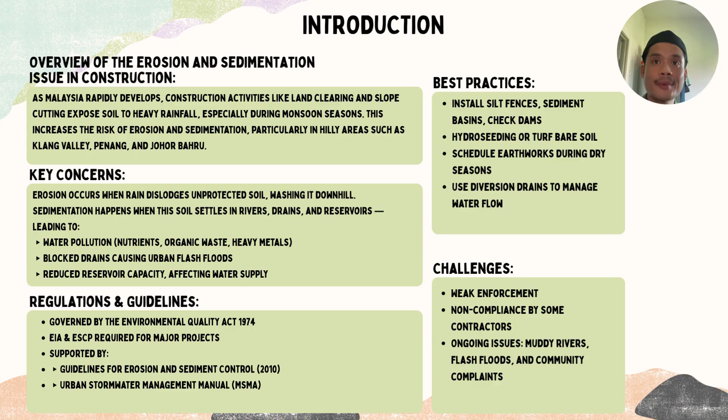What is the challenge? The challenge is, however, despite these tools that I explained, weak enforcement remains a major issue. Some contractors neglect or poorly implement control measures, leading to repeat problems like flash floods, muddy rivers, and public complaints.

Go to the next part, which is the importance of controlling erosion and sediment. Why it matters? Controlling erosion and sediment is especially important in Malaysia due to our frequent and intense rainfall. When construction sites are cleared or excavated, the exposed soil becomes highly vulnerable to being washed away by stormwater. If not managed properly, the soil will end up in nearby rivers, lakes or drains, which leads to sedimentation and environmental problems. And it also causes environmental impact.

Sedimentation doesn't just make the water cloudy, it disrupts aquatic life. When too much sediment enters a river or lake, it blocks sunlight, lowers oxygen levels, and can even bury fish spawning grounds. This affects our biodiversity and overall ecosystem health. Plus, the sediment often carries pollutants like oil, nutrients, and heavy metals that further degrade our water quality.

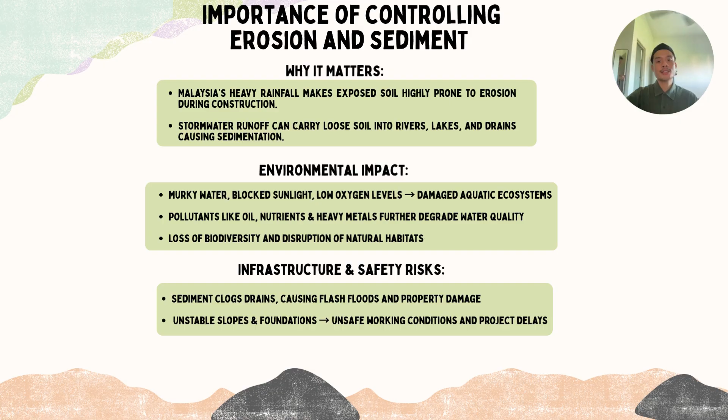It also causes infrastructure and safety risks. There are real risks to infrastructure and human safety. When drains are filled with sediment, it increases the chance of flash floods, especially during heavy rains. As such, uncontrolled erosion can destabilize slopes and weaken foundations, making the work site dangerous and delaying project completion. So, let's move on to the next part, which is our objective of this project.

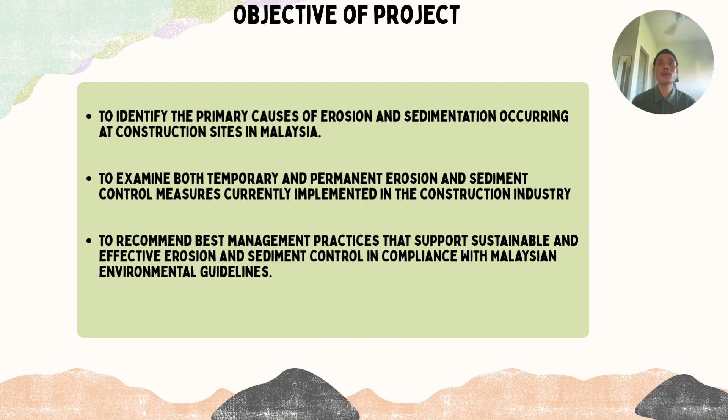First, we want to identify the primary causes of erosion and sedimentation occurring at construction sites in Malaysia. Second, we want to examine both temporary and permanent erosion and sediment control measures currently implemented in the construction industry. And for the third one, we want to recommend best management practices that support sustainable and effective erosion and sediment control in compliance with Malaysia's environmental guidelines.

Hello, Doctor. This part is a literature review. Understanding erosion and sediment risks in construction. Construction activities often expose soil to erosion, especially in rainy regions like Malaysia. This leads to sediment runoff harming water quality and aquatic ecosystems. Erosion types include rain splash, sheet, rill, and gully erosion, which transport soil into nearby water bodies.

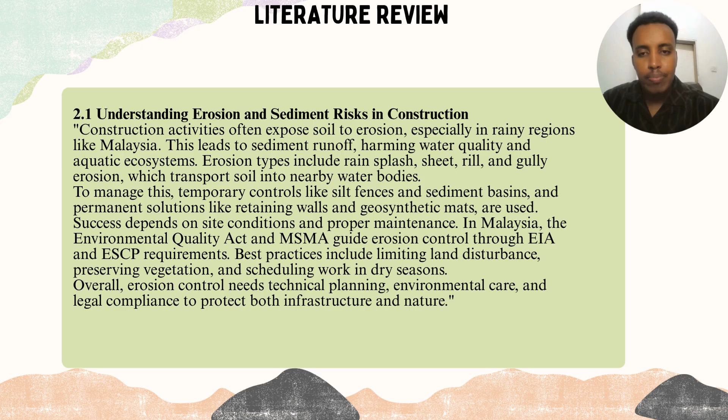To manage this, temporary controls like silt fences and sediment basins and permanent solutions like retaining walls and geosynthetic matting are used. Success depends on site conditions and proper maintenance. In Malaysia, the Environmental Quality Act and MSMA guide erosion control through EIA and ESCP requirements. Best practices include limiting land disturbance, preserving vegetation, and scheduling work in the dry seasons. Overall, erosion control needs technical planning, environmental care, and legal compliance to protect both infrastructure and nature.

Doctor, in this part, I will talk about the key issues and strategies for erosion and sediment control in construction. To highlight key issues in erosion and sediment control, we use a FILA table, which is about the facts, ideas, learning issues, and action plan, created to summarize the main points from the literature to guide the planning and action. So the first is facts, then ideas, learning issues, and action plans.

The fact is construction exposes soil to erosion, especially during heavy rain. The idea is you have to schedule earthwork during dry weather to reduce the erosion risk. The learning issue of this point is how can construction scheduling reduce erosion impact, and the action plan is to plan site work to avoid monsoon seasons, phase construction.

The other fact is erosion leads to sediment runoff that pollutes rivers and drainage. The idea is to use temporary controls like silt fences, sediment basins, and check dams. The learning issue is what are the most effective temporary erosion control methods. And the action plan: you have to install erosion control structures before starting the site clearing.

The other fact in this part is legal regulations. EQA 1974 requires erosion control planning. So the idea is you have to develop and follow an erosion and sediment control plan, ESCP. The learning issue is what are the legal requirements for erosion control in Malaysia. And the action plan is submit the ESCP with the environmental impact assessment for major projects.

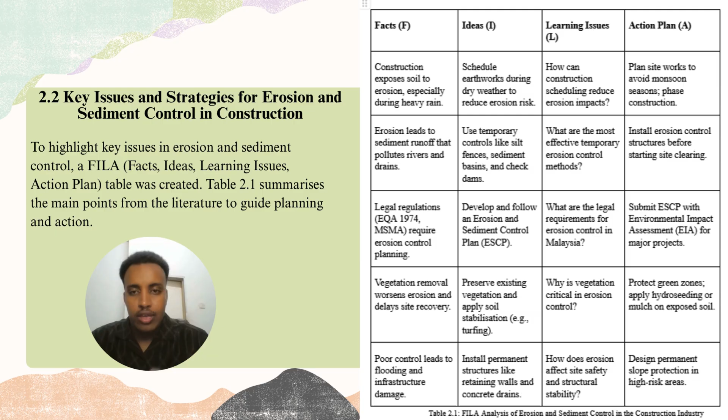The other fact in this literature review of the topic is poor control leads to flooding and infrastructure damage. The idea is you have to install structures like retaining walls. The learning issue is how does erosion affect site safety and structural stability. The action plan is you have to design permanent slope protection in high risk areas. That is the FILA table and literature review. Thank you so much, Doctor.

Now, I'm going to explain the types of erosion and sediment hazard. The first one is rain splash erosion. It's a type of water erosion where the impact of raindrops on bare soil detaches and moves soil particles. The second one is sheet erosion: loose or unattached soil is carried downhill in a homogeneous layer without any obvious concentrated flow. So, sheet erosion happens.

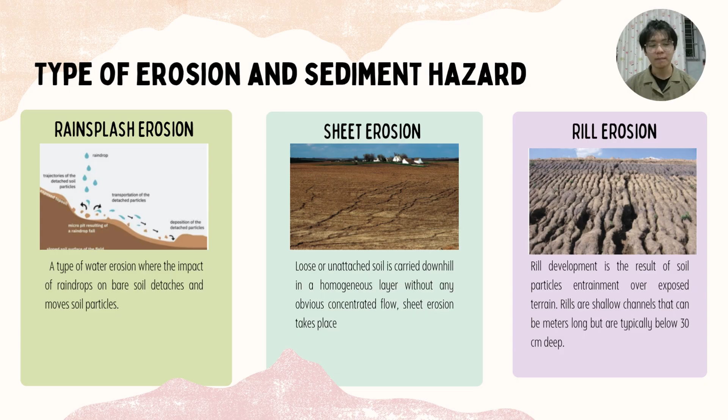The third one is rill erosion. Rill development is the result of soil particle entrainment over exposed terrain. These rills are shallow channels that can be meters long but are typically below 30 cm deep. The fourth is gully erosion. Gullies are incised channels which often begin as rills. The head wall of a gully tends to cut back upslope and the side walls retreat through slumping associated with subsurface water, altering the stability of the gully sides.

For riverbank erosion, under natural circumstances, rivers continuously reshape their channels and erode their banks. The last is tunnel erosion. Tunnel erosion frequently occurs in areas where the texture of the overburden, or weathered rock and soil, changes. Water moving readily through coarser materials may not be able to infiltrate into an underlying finer layer, and so it moves downslope.

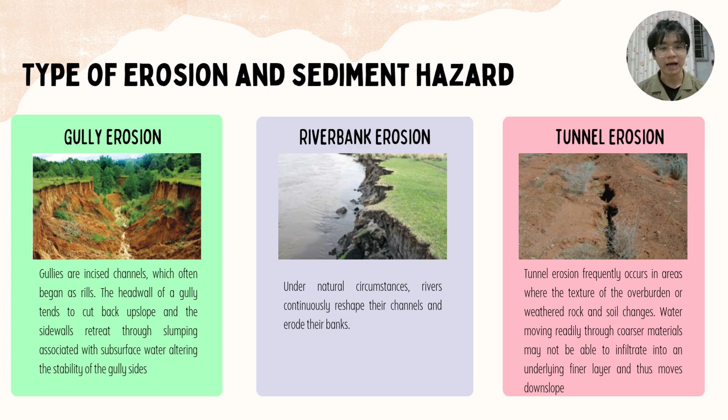For the environmental impact of erosion and sediment control on construction sites, there are many reasons that cause the impact. The first reason is the disruption of the natural balance between soil structure, vegetation cover, and surface water movement. The second is the protective layer that stabilizes soils and absorbs the impact of rain is lost when vegetation is removed and the earth is disturbed. The third is the runoff gains erosive energy in the absence of control methods to slow, spread, or filter the flow when vegetation is removed and the earth is disturbed.

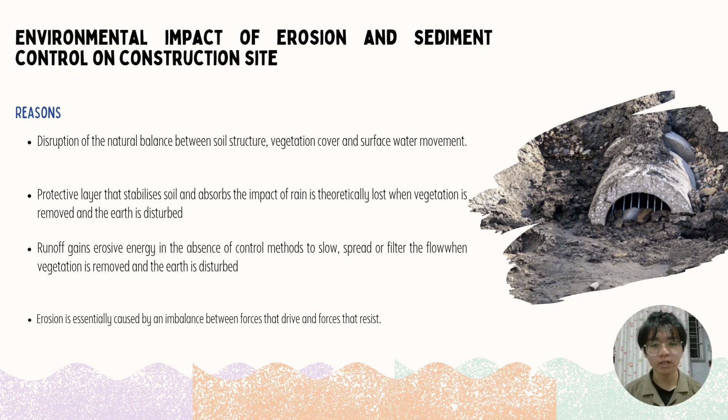The last reason is erosion is essentially caused by an imbalance between forces that drive and forces that resist. After we know why soil erosion impacts the environment, now let's look at what impacts soil erosion causes. There are three major impacts. The first one: during construction, soil erosion becomes a major issue due to exposed surfaces. This leads to water pollution, as sediment-laden runoff carries not only soil but also harmful construction pollutants into nearby water bodies, increasing the turbidity of water and affecting aquatic life.

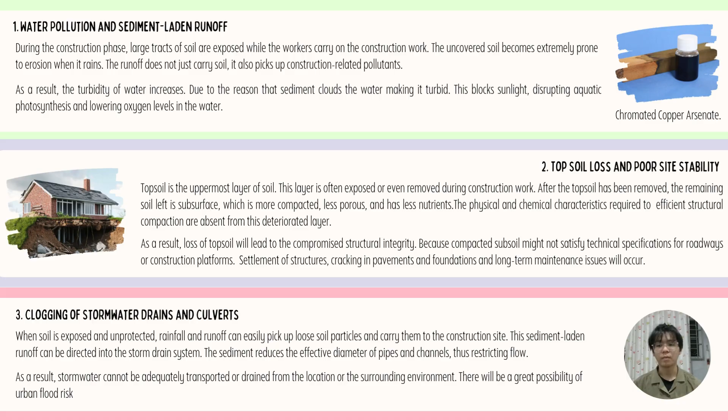For the second one, the removal of topsoil weakens site stability as the remaining subsoil is less suitable for construction. This can cause structural problems such as pavement cracking and foundation settlement. Lastly, the loose soil can clog stormwater drains, reducing water flow and increasing urban flood risk. These issues highlight the importance of proper erosion and sediment control during construction projects.

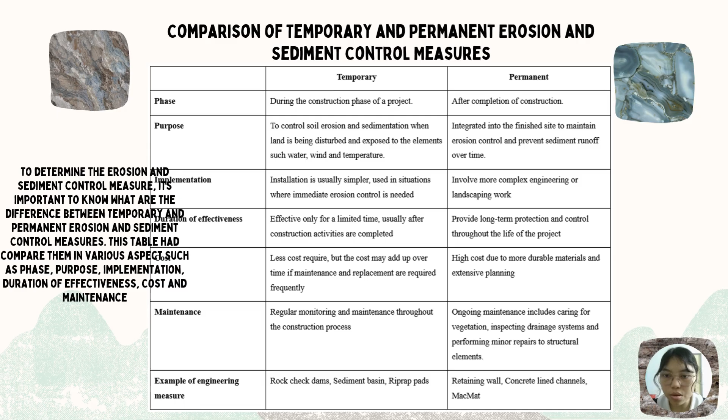Now I would like to present a recommendation. To determine the erosion and sediment control measures, it is important to know the difference between temporary and permanent erosion and sediment control measures. This table compares them in various aspects, such as phase, purpose, implementation, duration of effectiveness, cost, and maintenance.

The example temporary erosion and sediment control measures studied in this project: first is the rock check dam, which is used to reduce runoff velocity, trap sediment, and minimize downstream erosion. Second is the riprap pad, which is used to stabilize slopes affected by seepage and to reduce runoff velocity, thereby enhancing infiltration potential and controlling downstream erosion.

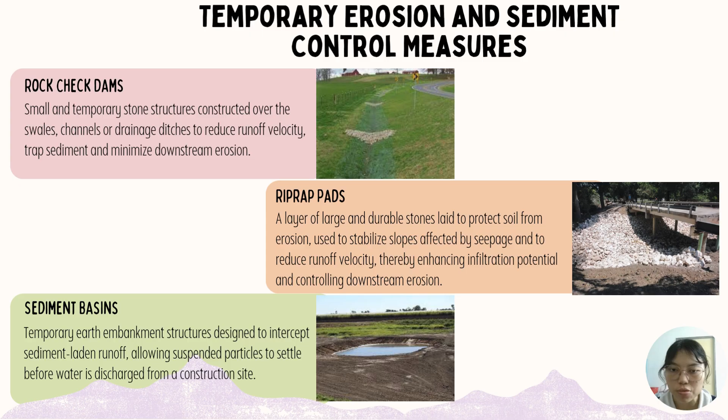Third is the sediment basin, which is designed to intercept sediment-laden runoff, allowing suspended particles to settle before water is discharged from the construction site. The example permanent erosion and sediment control measures: first is the retaining wall, which is a permanent structure to hold back soil, reduce erosion and preserve valuable nutrients and sediment within a landscape.

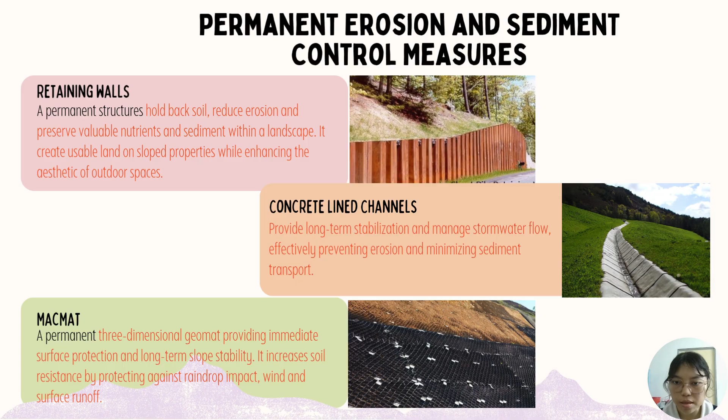Second is the concrete-lined channel, which provides long-term stabilization and manages stormwater flow, effectively preventing erosion and minimizing sediment transport. Third is the MacMat, which is a three-dimensional geomat providing immediate surface protection and long-term slope stability.

So I am going to explain the best management practices, BMP, in erosion and sedimentation control. It is essential during construction to minimize erosion and sedimentation while maintaining environmental quality. So first, limiting the disturbed areas reduces the land exposed at any time by clearing only where necessary and preserving natural vegetation to act as a barrier against erosion.

Second, construction scheduling. Construction scheduling plays a key role in this practice. The main soil work should be done during the dry period to avoid erosion from rain. For example, in Malaysia, major earthworks should be avoided from November to March during the monsoon season.

Next, preservation of natural vegetation helps stabilize the soil, slow down the runoff and filter sediment. By fencing off trees and making no-disturb zones, this can protect the ecosystem and reduce the need for artificial control methods.

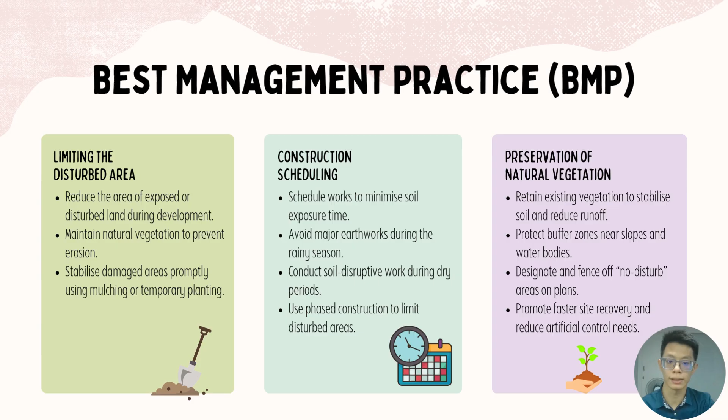Next, soil stabilization. This protects exposed soil from being eroded by wind, rain or construction activity. Temporary methods include mulching, erosion control blankets, and grass seeding. For long-term use, chemical stabilizers or vegetation like grass can be used.

And next, site inspection and maintenance. It ensures that erosion control measures like silt fences or sediment basins are working properly, and regular checks, especially after heavy rain, help identify issues early.

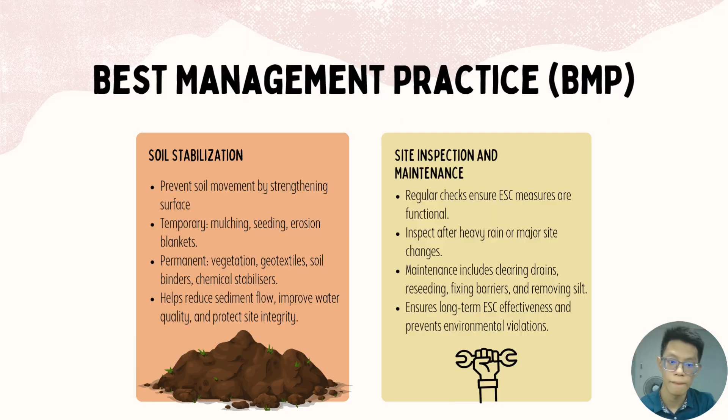So now I will move to laws and guidelines. In Malaysia, effective erosion and sediment control must comply with laws and guidelines set by the government. First, the Environmental Quality Act 1974 ensures that developers protect the environment during construction. Under Section 34A, major projects must submit an environmental impact assessment, or EIA, to assess risks like erosion. Without DOE approval, no construction can begin.

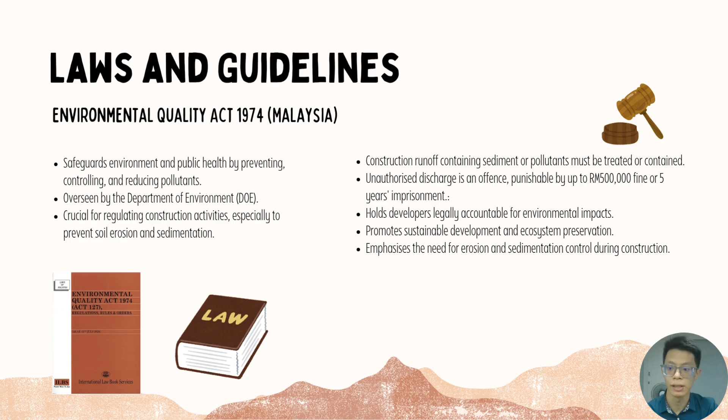Next, discharging polluted runoff into rivers without treatment is an offence, punishable by a fine of up to 500,000 or 5 years' jail time. It holds developers legally accountable for environmental impact and promotes sustainable development and ecosystem preservation. It also emphasizes the need for erosion and sedimentation control during construction work.

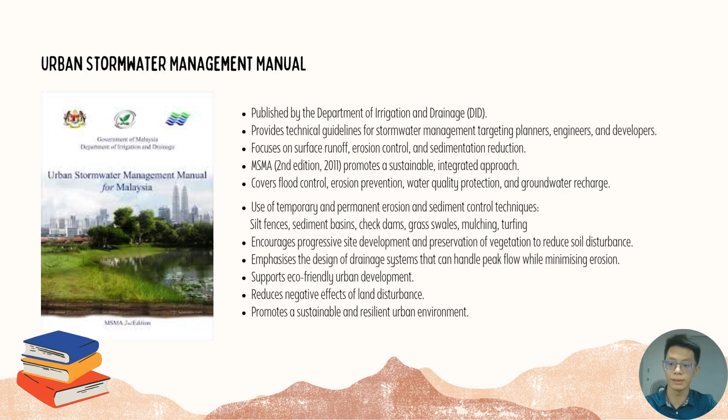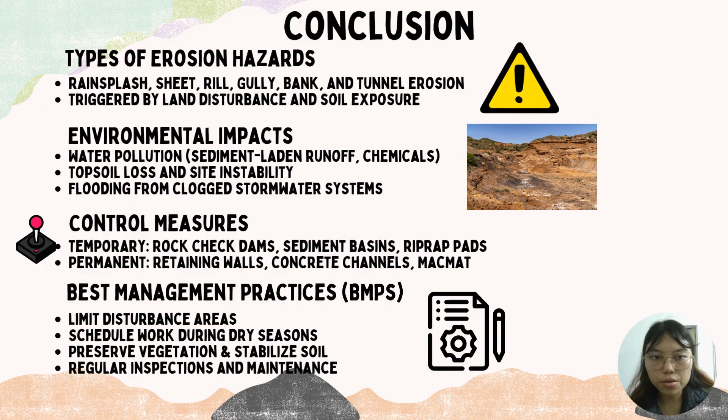In this project, we have identified the types of erosion hazards and their environmental impacts listed in this slide in order to determine appropriate control measures and best management practices. This approach helps to prevent environmental degradation and legal violations, improve site safety, reduce maintenance costs, and support sustainable long-term site usability.